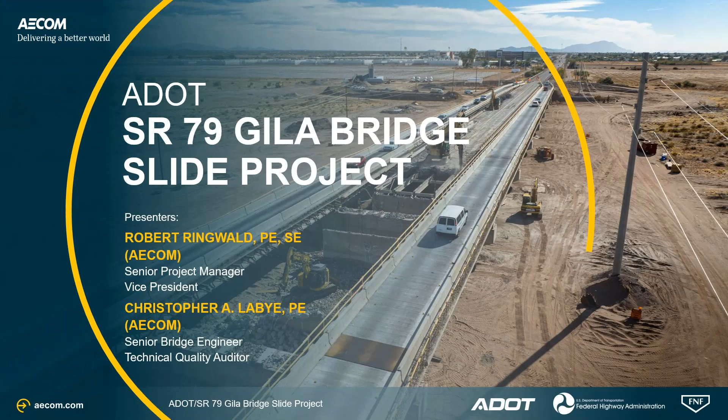All right, thank you, Kathy. Okay. So this is for the SR-79 Gila River Bridge slide. It was a project done with ADOT and the Association with Federal Highway Administration. Go ahead, Chris. Next slide. Okay, this is Chris and I. Go ahead.

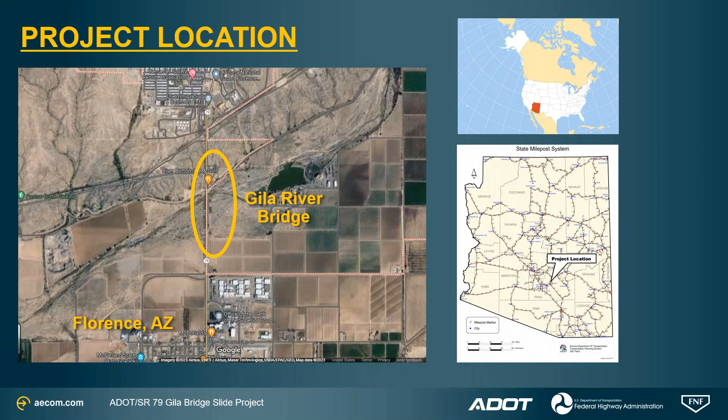Okay, the location, it is in Arizona. The location is kind of southern Arizona. It's just north of the town of Florence. And this is a critical road. It's kind of a bypass if anything happens on I-10, which is a major connector between Phoenix and Tucson. So this is a bypass. It does get a lot of traffic. Go ahead.

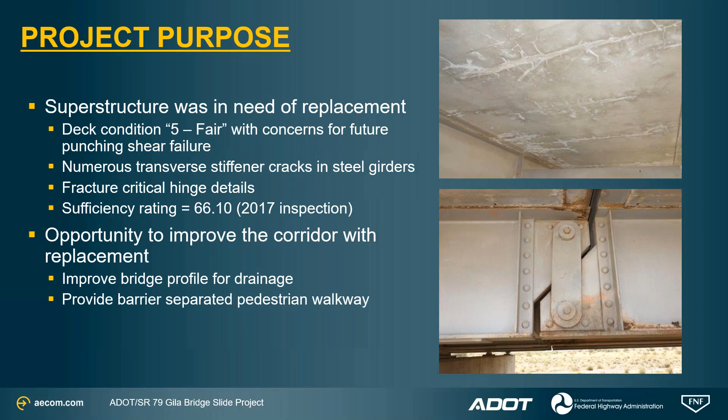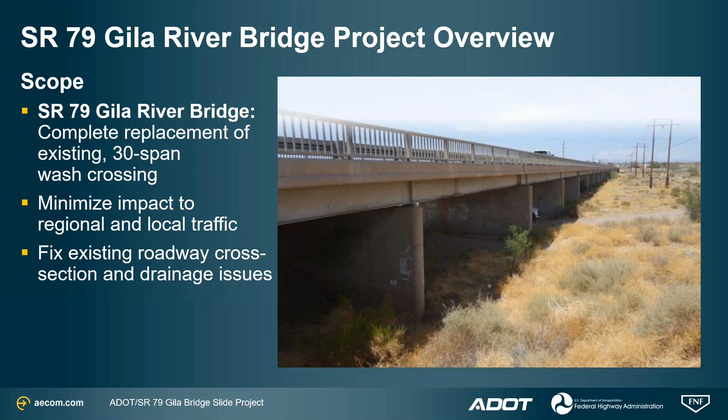So the need for it was the superstructure was in deteriorating condition. The deck was in bad shape. We also had these pin and hanger details which were fracture critical. So it was decided to replace the bridge. Next. So it was complete replacement. The existing bridge was a 30-span bridge. And really our focus was to minimize impacts to regional traffic because this is a highly used corridor. Next one.

So this is the existing bridge, 30 spans. There were several different bridges built. I think the first one, that isn't showing up here, was even in the late 1800s. It used to be an old wagon trail. They built a bridge half the length of this bridge, and then after some flooding, they extended the bridge, made it twice as long after they had flood issues. So you can see all these existing piles and foundations. Next one.

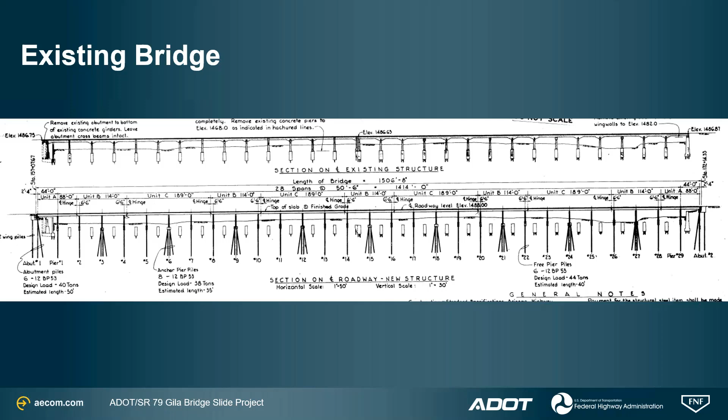All right, so we did follow a NEPA process. The utilities were a major issue. We had utilities on both sides of the bridge, and we had to get them out of the way. Right of way, we acquired right of way. We even acquired a utility corridor on the east side of the bridge.

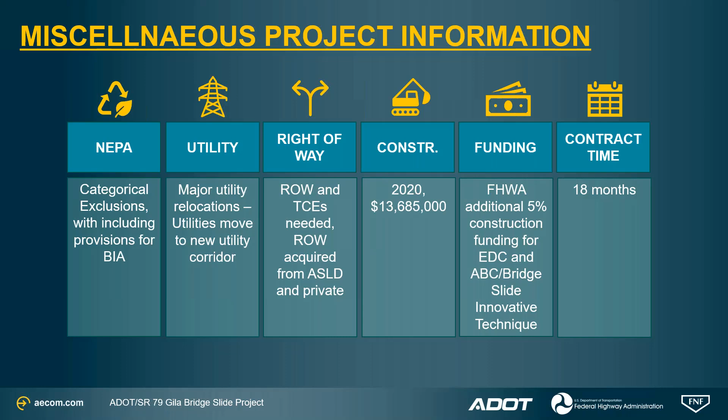Construction was funded in 2020, and it was almost 14 million. FHWA, because it was Every Day Counts, and I'll get into that, but there were like 8 Every Day Counts initiatives. We were able to increase the funding by 5%. And then the contract time was around 18 months.

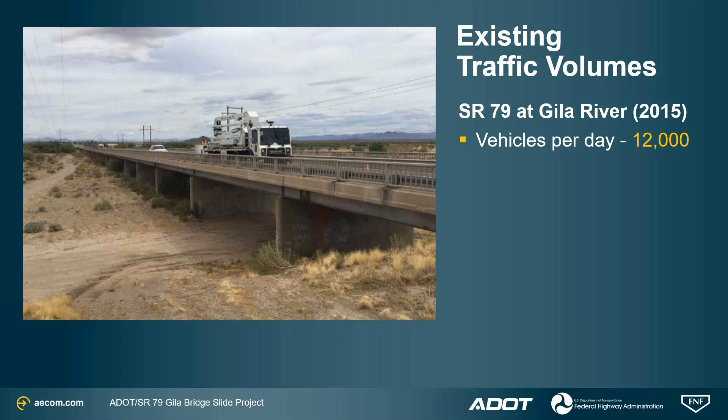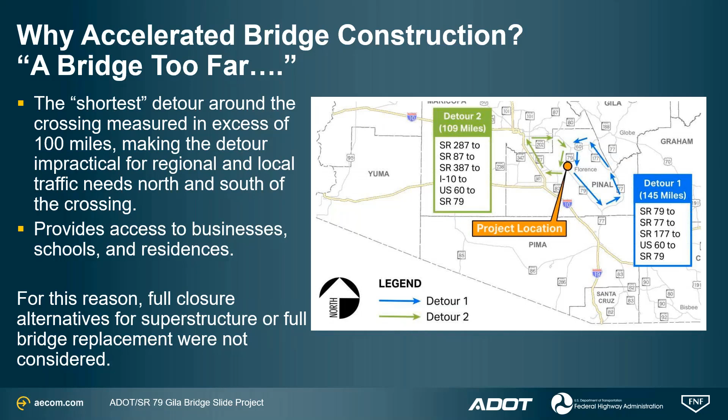So we did, FNF Construction was selected. They were the construction manager at risk. And the project team developed a slide solution for this, where we could build the bridge off.

We could build the slide portion off to each side of the bridge, come in, demo the existing bridge, build the approaches while traffic was maintained on the slide portion, and then slide it in place over 2 weekends.

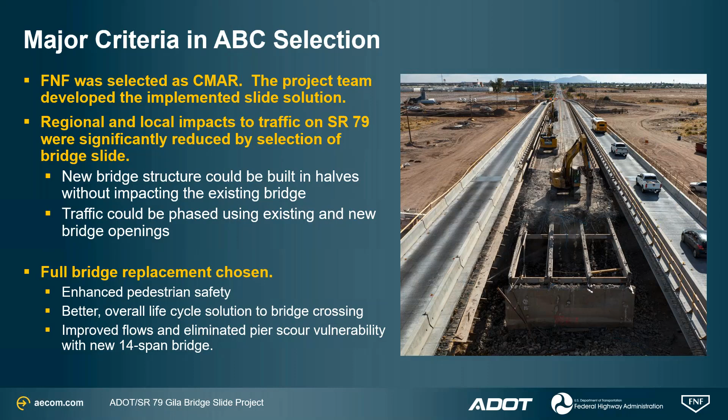Next one. So construction manager at risk, CMAR, also known as CMGC, depending on where you're at. The way that works is you have the owner, which was ADOT, and the design engineer reports directly to ADOT. We also have the contractor, who is selected based on qualifications. We always recommend them being selected early because it allows us to get good input.

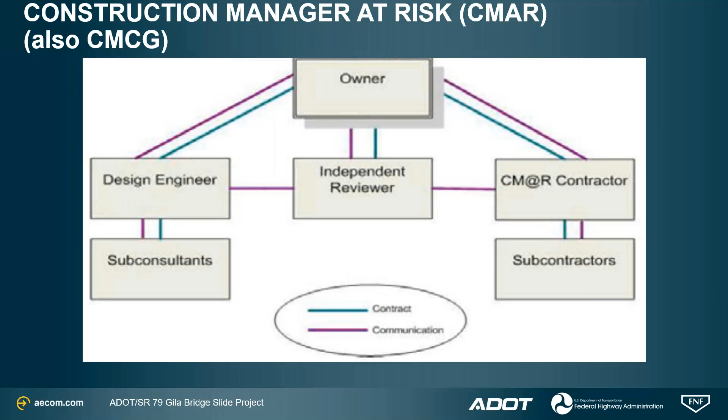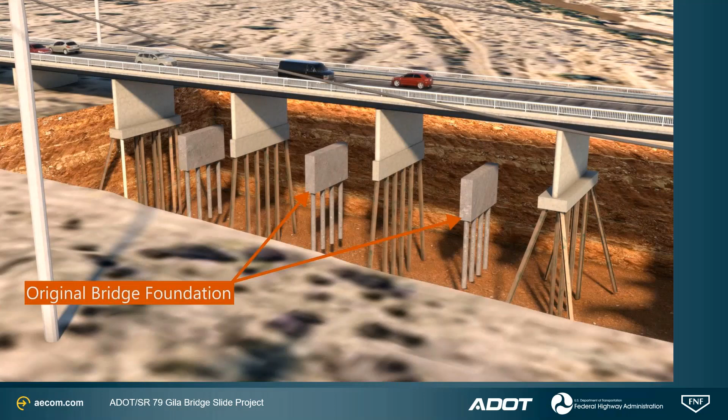So here's a video that shows a little bit. Now, we did have a utility corridor. We had power lines that were in the way. We moved the power lines out of the way so that they could erect the girders, do the drilled shafts, place drilled shaft reinforcing. And then there's the existing foundation, so you can see what we had to miss.

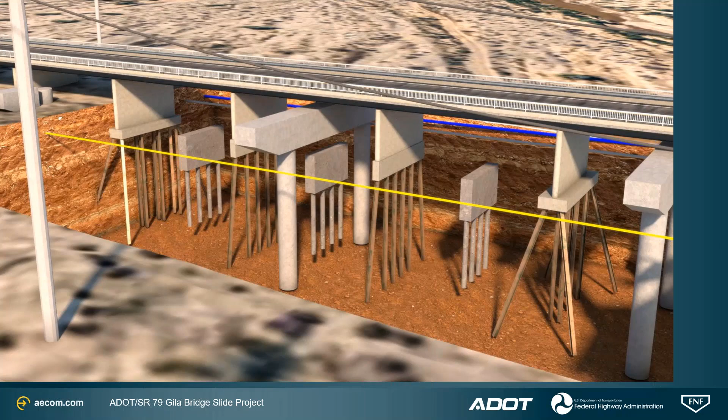Okay, and then what we did is we built our bents underneath the existing bridge on drilled shafts, and the drilled shafts were placed on the outside of the existing bridge so they could get them in. And that helped us avoid some of those existing foundations. Next slide.

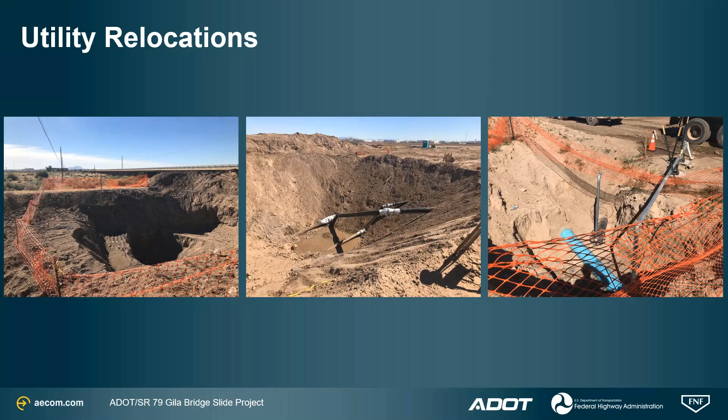Okay, so utility relocation, that was a major thing with schedule, trying to get all the utilities relocated and right of way cleared for that. Next one.

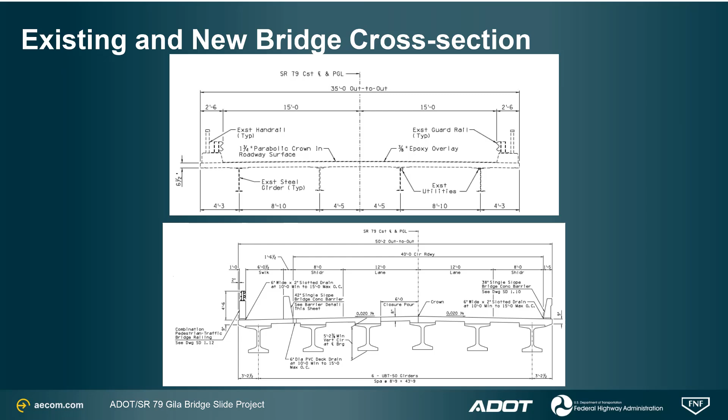Thanks, Rob. So as we just mentioned, we were going to construct a bridge to provide shoulder and sidewalk enhancements. So when we considered the development of the bridge slide, the proposed bridge was 14 spans overall, with spans arranged at 101 feet on center with 99-foot 5-inch end spans. And that was done to line up with existing pile foundations that would not be in conflict with the shafts. So the span arrangement actually worked out fairly nicely.

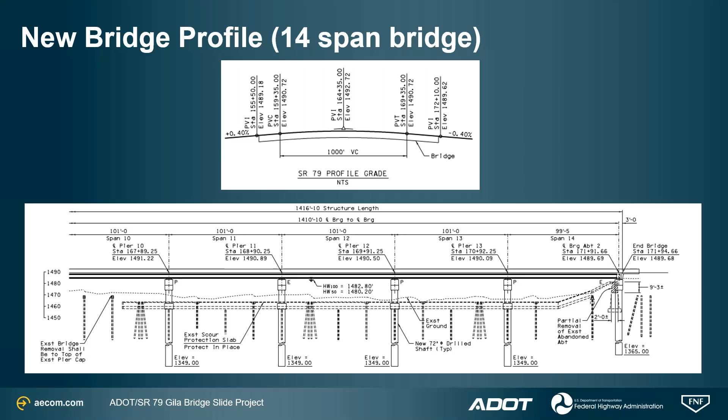So in order to accomplish the bridge slide itself, as Rob mentioned, we constructed drilled shafts and columns on either side of the existing bridge and built the pier caps beneath the existing bridge superstructure. We used 58-inch bulb T precast concrete girders, 3 girders on each side.

And what this allowed us to do was to build each half of the bridge on either side of the existing bridge, which allowed the existing bridge to remain in service while all of this could be built on either side.

And once the decks were poured and the diaphragms and slide shoes were completed, we were able to shift traffic to the new portions of the bridge, each half on either side, using temporary concrete barriers. And this allowed us to demo and remove the existing bridge between the two bridge halves.

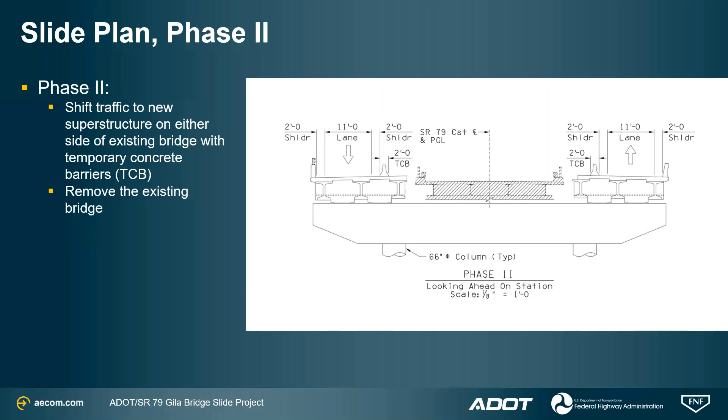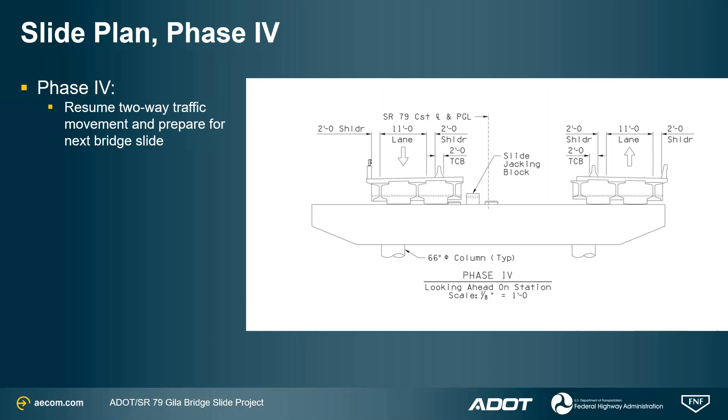Once we were ready to actually do the bridge slide, each bridge slide was accomplished during a single weekend. Traffic was shifted to the other side, with flaggers, in order to permit one-way traffic movements across the bridge while the bridge slide was taking place. Then we would resume the two-way traffic and prepare for the next bridge slide. And then we did the same thing on the other side, using the slide jacking block and the PT rod, which we'll show you in a second.

And then in the final phase, we still have the temporary concrete barriers, and we had sufficient room to do a 6-foot closure pour between the two temporary exterior girders, which would become interior girders. And that width of a closure pour allowed us to lap in the reinforcement steel as well as provide a closure between those two deck edges to smooth out the overall transition. And during that time, expansion joints were placed at the end of each frame.

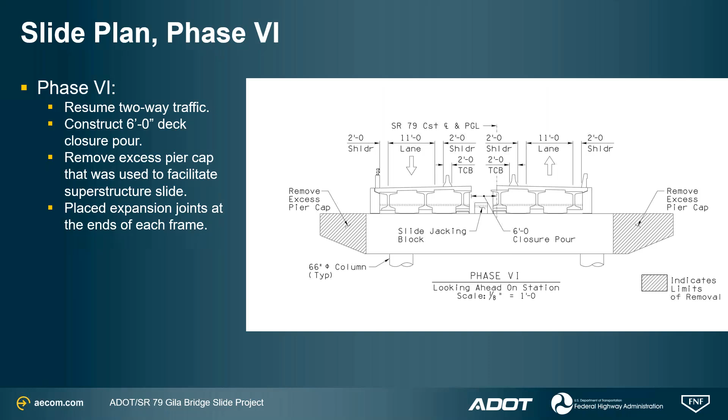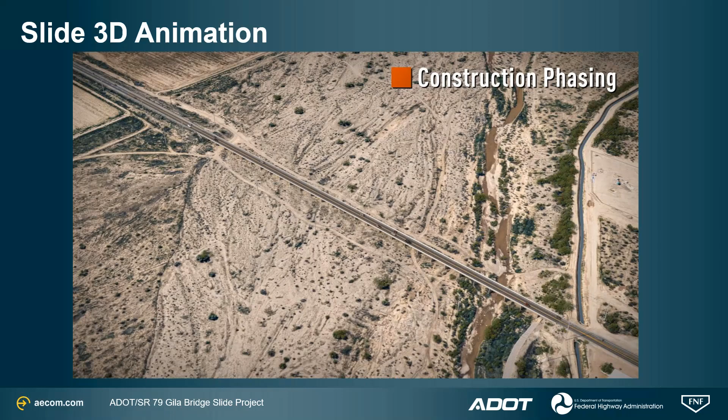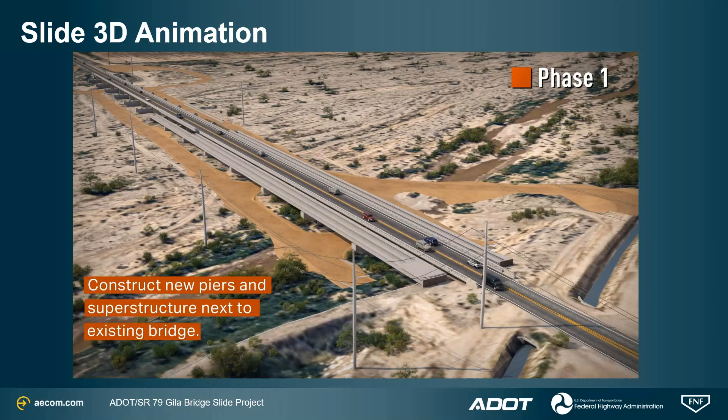A picture is worth 1,000 words, but video really helps to illustrate how this actually takes place in practice, especially with a bridge that's 1,416 feet long. So you can see that the construction access roads were built to accommodate construction vehicles. The drilled shafts and the piers, as well as the girders, were erected on both sides of the existing bridge. Traffic was then shifted to the outside so that the existing bridge could be demoed in between.

And then, hey, Chris, this did allow us to build the abutment in front of the existing abutment and allowed us to build the approaches. Correct. During the demo phase. With a very similar kind of detailing, except for a back wall.

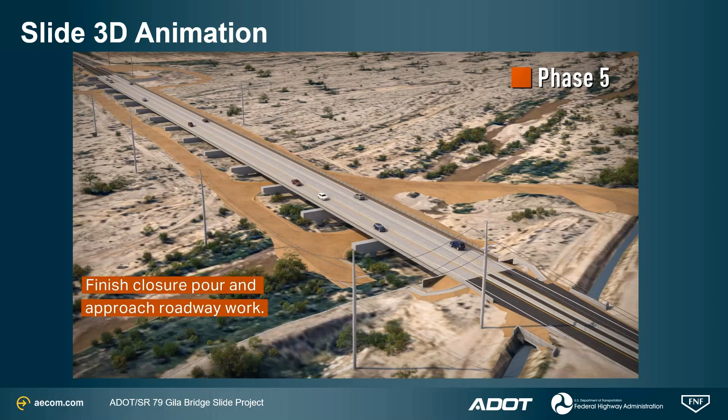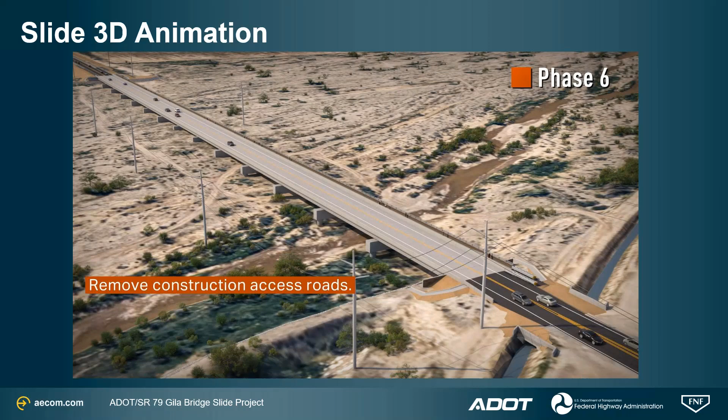Now, when the bridge slide was taking place, it was a series of four 3-span frames and one 2-span frame. So each unit that was continuous was slid in unison. Then the closure pour was placed, and then everything else was finalized, and on the new pier cap, the superfluous edges were removed. We'll get into that shortly.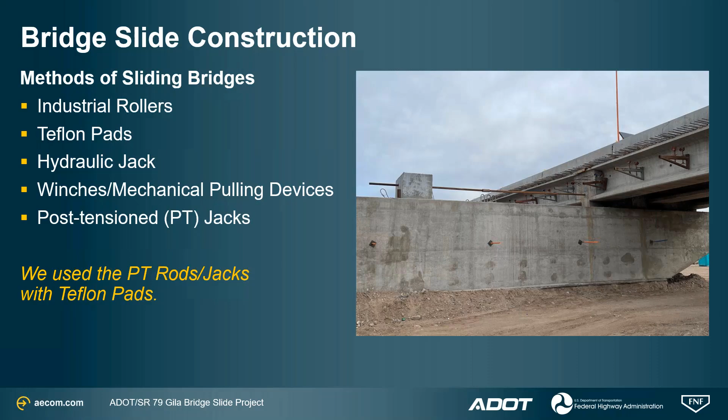So there are several different methods of sliding bridges. We opted to use PT rods with Teflon pads. It gave us the ability to limit snapback, improve jacking efficiency, and with end blocks that were providing the ability to back up the slide.

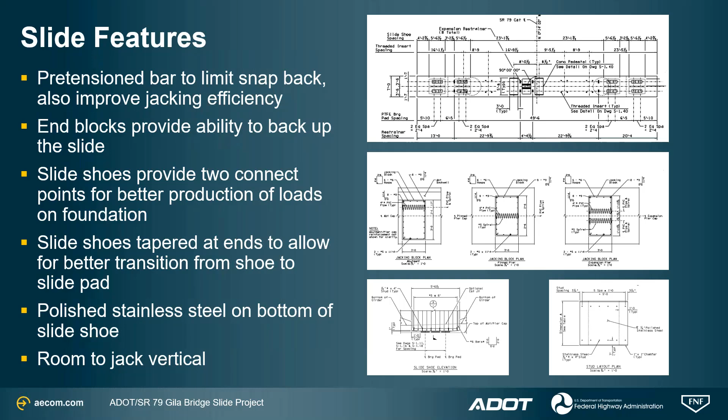The slide shoes that you can see on the bottom left allowed us to use a series of Teflon pads that would allow the bridge to walk across as it slid, and they were tapered, which allowed for better transition of the slide shoe onto the Teflon pad, so it could gradually transition into the Teflon pad as pads were removed and advanced as the jacking was taking place. It also allowed us to jack the shoes vertically for final bearing placement.

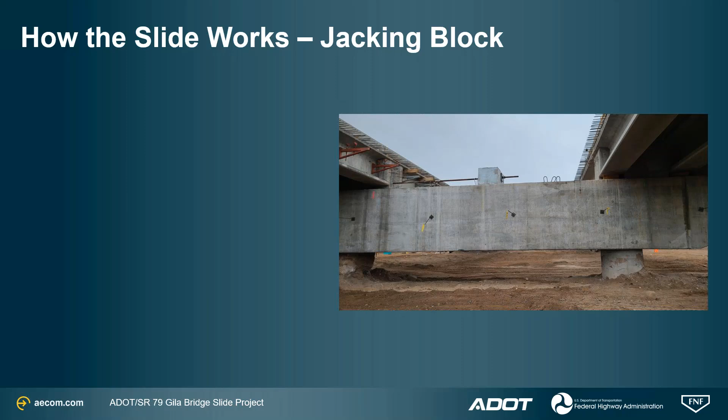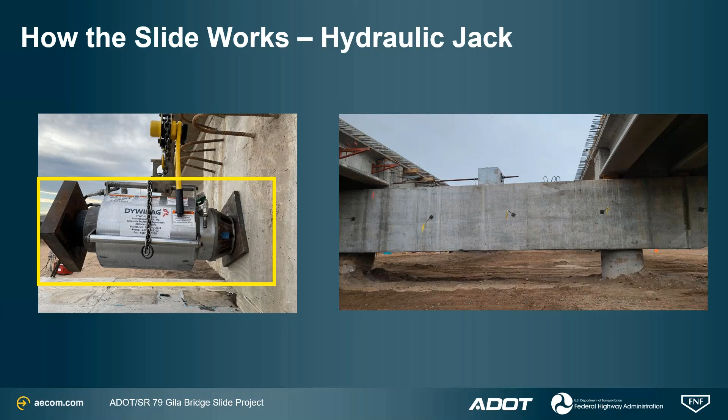Now, these are the elements of the actual slide. So first of all, we have the jacking block, and that is designed to take the full load of the jacking force for sliding. Then this is the actual hydraulic jack itself using DYWIDAG. Then there's the PT bar itself.

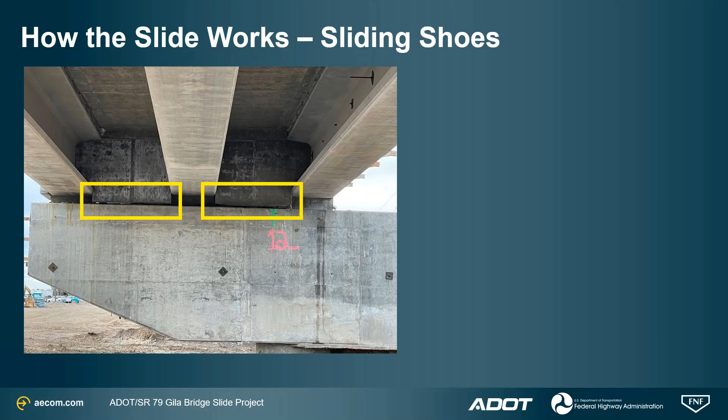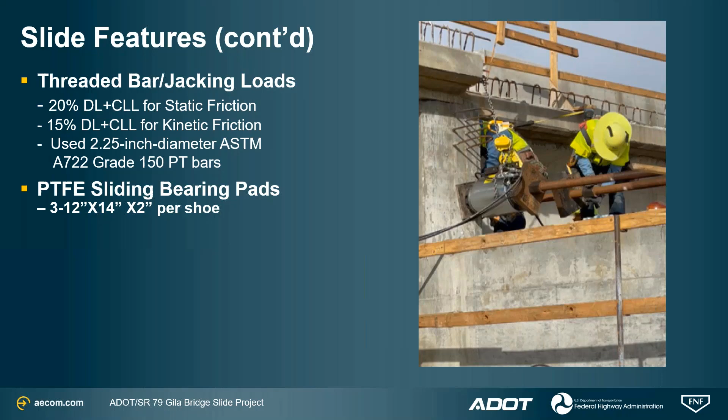The threaded bar was designed with 20% of the dead load and the construction live load for static friction, and 15% of the dead load plus the construction live load for kinetic friction. We used a 2¼-inch diameter grade 150 PT bar, and the sliding pads consisted of three 12-inch by 14-inch by 2-inch Teflon-coated bearing pads.

One of the complications that we ran into with the slide: this is a typical fixed and expansion restrainer detail, and this is usually cast into the pier cap to be eventually closed in with the pier diaphragm. However, we could not actually cast this into the pier cap without the slide interfering with the restrainer locations. So we had to come up with a means of incorporating that into the pier cap and at the same time allowing for the bridge slide to take place.

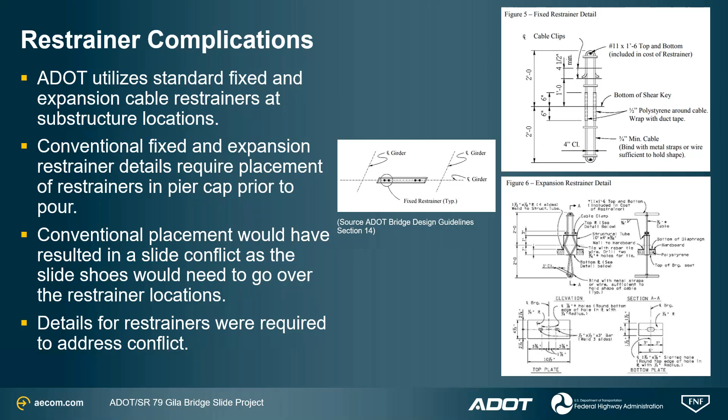The solution that we arrived at was to place a steel tube insert that allowed the contractor to tuck in the assembly into the pier cap itself so that the bridge could slide across the top of it, and then the cables could be pulled out and the restrainer assembly could be completed at that time.

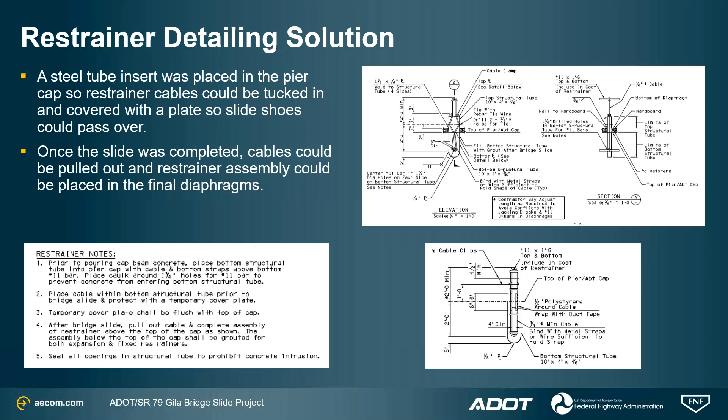So as part of the bridge slide design, all the bridge caps, pier caps had to also be designed with the new bridge on either side prior to the slide. And then there's a phase where you've got half of your bridge slid into place, and then you've got the phase where the remainder of your bridge is slid into place with a closure pour. So you're looking at essentially several design conditions to make sure that you've got sufficient flexure as well as stirrup steel in there to accommodate whatever loading condition might be taking place during the individual phases.

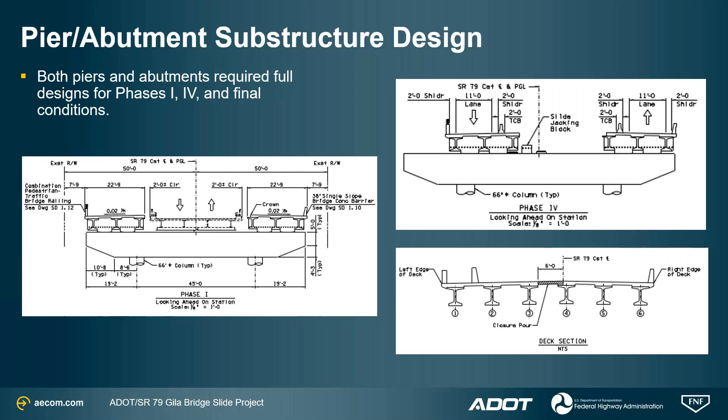Upon completion of the bridge slide, excess pier cap material was removed. Part of it was to mitigate any excessive dead load that would result in undesirable PT effects. But also there was a concern on the sidewalk side that somebody may hop a barrier and decide to walk along the pier cap, and that was a safety issue that we were definitely concerned about.

So one of the things that we detailed for that pier cap removal was the means of providing a clean looking pier cap at the end, where the reinforcement would be tied in on either side to make it look like a clean finished pier cap at both ends. It also helped to mitigate the hydraulic impact. With that, I'll turn this back over to Rob to talk about the construction.

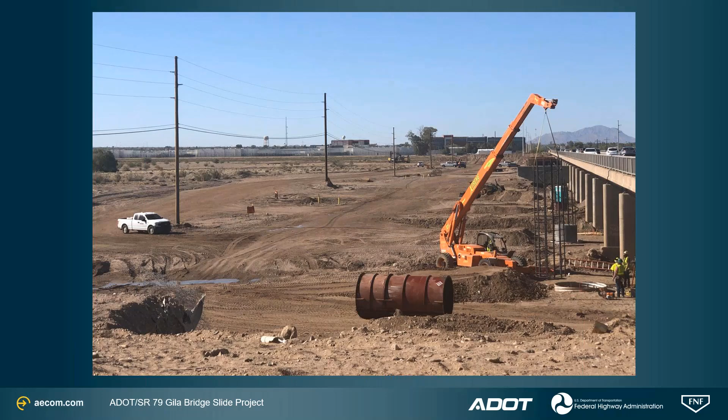So this is under construction now. In Arizona, a lot of our rivers don't flow all the time. So we did have a little bit of flow down in the Gila, but when we get monsoons and other things, they could become raging, and they get quite a bit of scour. So one of the issues was that we had to account for scour. There was some potential aggregate mining upstream. So the scour depth had to be designed around 45 feet. So very critical for the bridge.

You can see here, in this picture the power lines that you see were relocated along a utility corridor to get them out of the way, and this is them setting the reinforcing for the drilled shafts. Next slide. So this is them building it. The pier caps, it was kind of a shallow foundation there, but again, we can get up to 45 feet of scour. You can see where we're building the bent cap underneath the existing bridge, so we can keep the traffic open. Next slide.

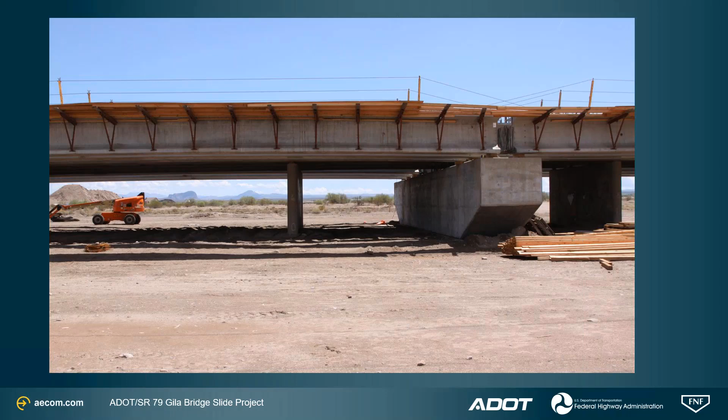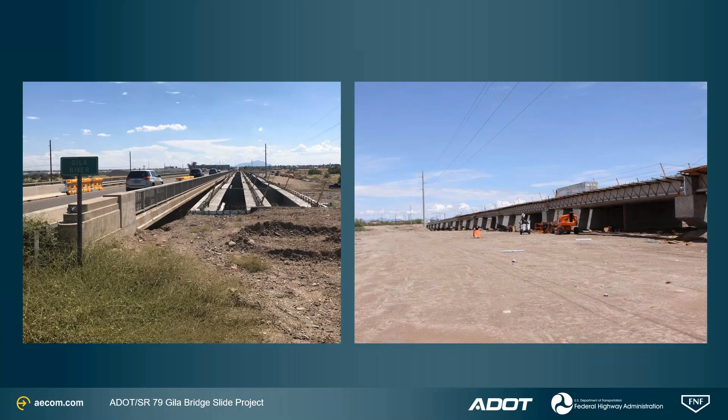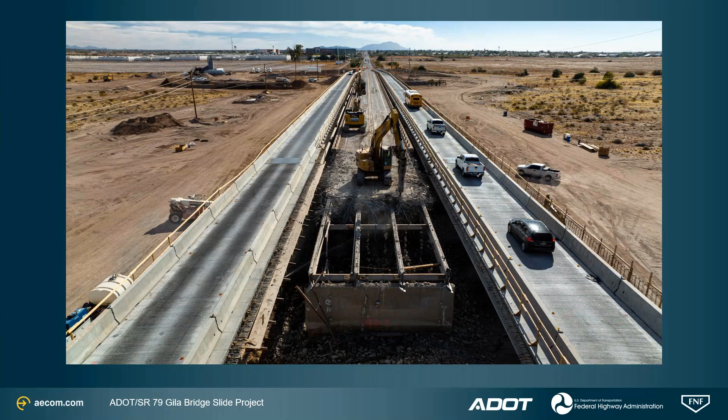There's another one where they set the girders, set the overhang formwork. Next slide. So at this location, during this phase, we were able to build the approaches because the abutments were set in front of the existing abutments. Then we built the approaches for the next phase, and we were able to demo out the existing bridge while traffic was on both sides. Okay, next one.

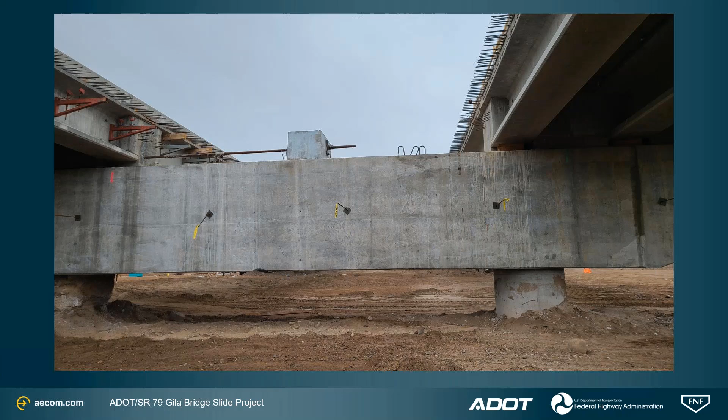Okay, this shows that center block with the PT rod. On other bridges, we put a block on both sides so we can reverse it. On this one, we worked with the contractor. Given that we weren't sliding very far, we didn't have a whole lot of elongation of the rod. We just went with a single block in the middle. Okay, next slide.

So we were out there the whole time during the slide process. We had engineers on site, myself. For one of the frames, it took them approximately 8 hours to slide one frame. So they were sliding 2 frames at a time. The weekend closure was about 10 o'clock on Friday night to, I believe, 5 o'clock on Monday morning, when they had to have it open for traffic.

And during that time, the traffic was one lane on the other side with the stoplight. We got a little bit of a backup, but not too much. But the bridge was able to be slid within that time frame. If they were really pushing it and trying to be a little bit more efficient, I think it could even be less. Like I said, about 8 hours per slide per frame. Okay, go ahead.

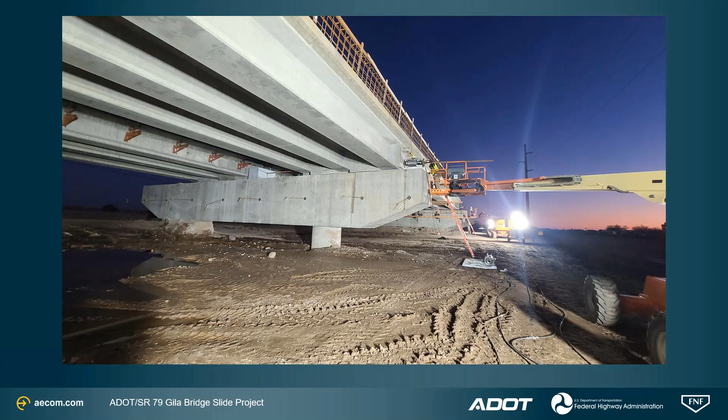Okay, another picture during the slide. Like Chris said, they do monitor the slide so that we're trying to keep it less than a ½ inch of difference between each of the diaphragms. They constantly are measuring that to make sure that it's being slid at the same rate. If we get it too advanced on one of the ends, you can get it skewed a little bit and out of alignment.

In between each of the frames, we did have like a 3-inch expansion joint, so there was a little bit of gap in between each one. This shows when we get a flood in Arizona. We did get some monsoon weather in January, and the river was flowing pretty good. Luckily it came down a little bit so we could complete the slide the following weekend. We didn't have to delay anything. Next one.

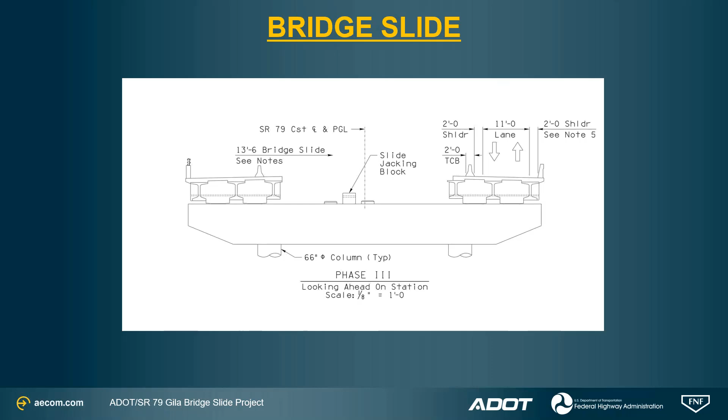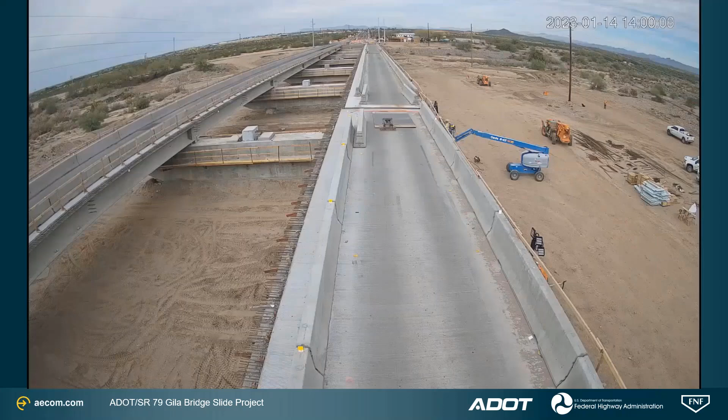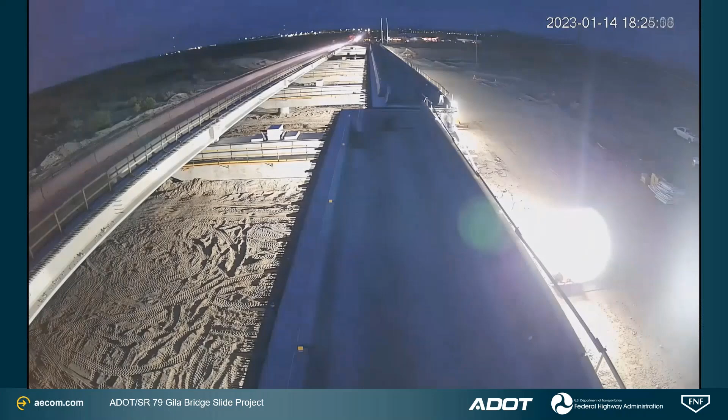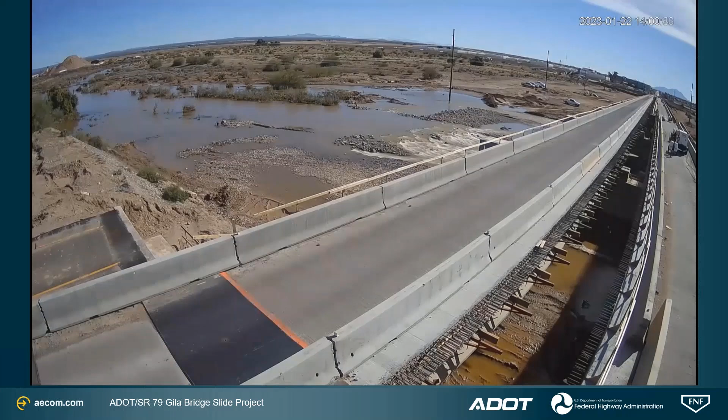Yep. And then over the expansion joints, we just put metal plates so that traffic could cross. You can see the metal plate sitting there. But here's one of the slide, actually. When you're out there watching these slides, it's kind of like watching paint dry. They move pretty slow. This is where they're sliding one of the last frames in place, and you can see where we're going to have our closure pour.

We had, I think, about a 6-foot closure pour. We try to make those closure pours as large as possible because you do have a little bit of difference in camber between the 2 bridge phases, so we want to give it as much tolerance so you have rideability there. Okay. Are you playing the video, Chris? Yeah, this is going to be a video that ADOT, well, I'm sorry, my apologies.

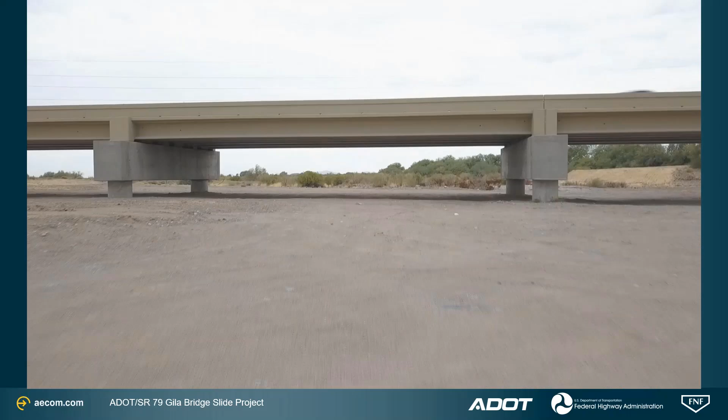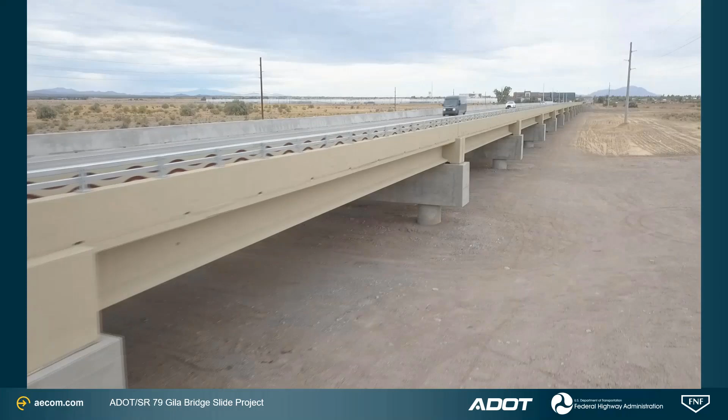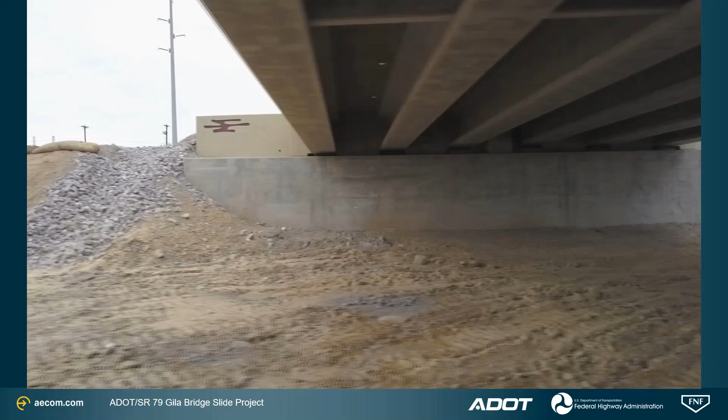This is actually drone footage of the completed bridge where you can see the individual elements. There's the abutment that Rob had mentioned. Right, and at the abutments, we had wing walls as part of the slide, and we just left those in place. Those acted like the wing walls, so that saved cost. FNF was a really good contractor to work with in the CMAR process. That really works well because we have their input starting during the 30% design.

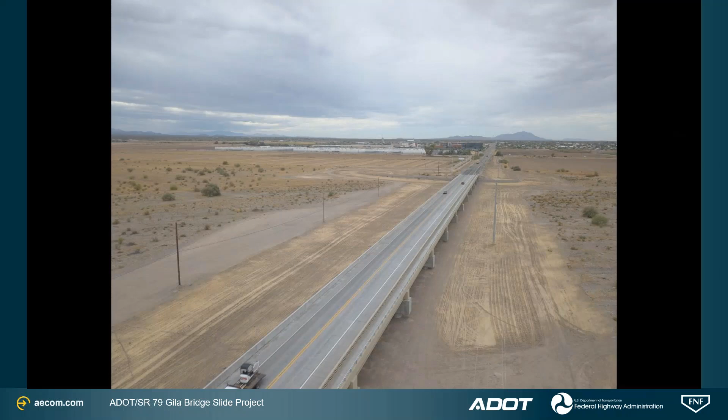Right. So the next video is something that ADOT put together for public relations to let everybody know what was going on with the project and how everything was advanced.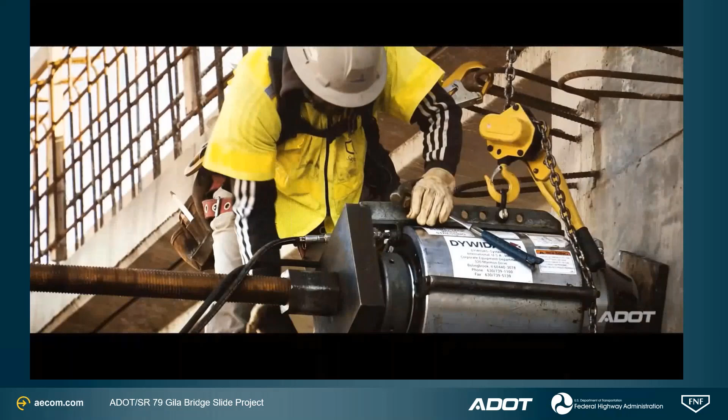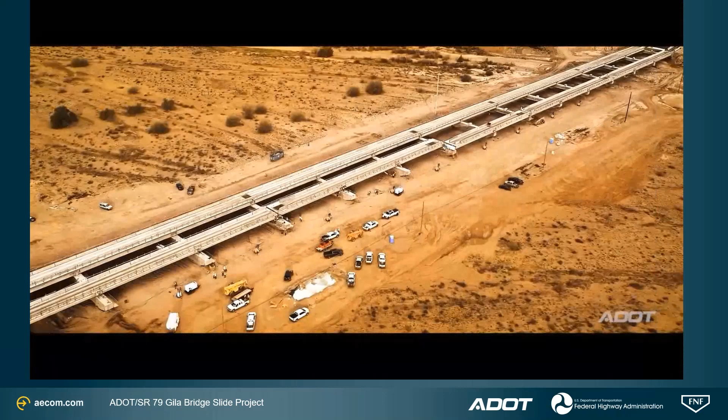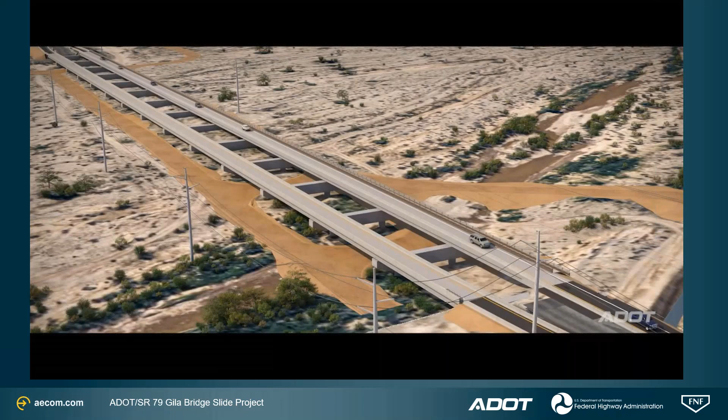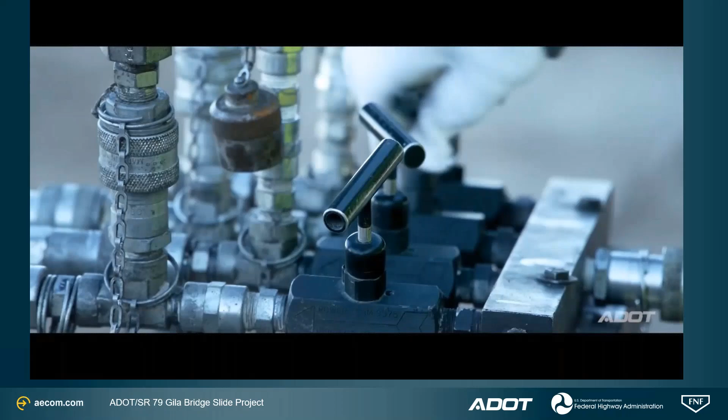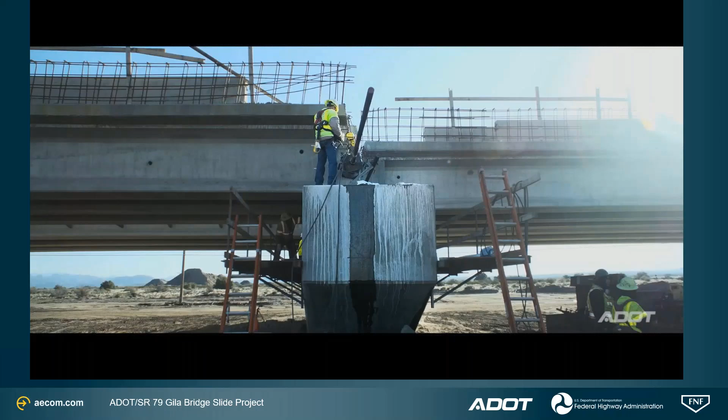We use hydraulic jacks to push it in, and they actually use Dawn soap to keep it moving. It just helps it go a lot smoother, and it's safer in the environment as well. Correct. Takes oil off the baby ducks.

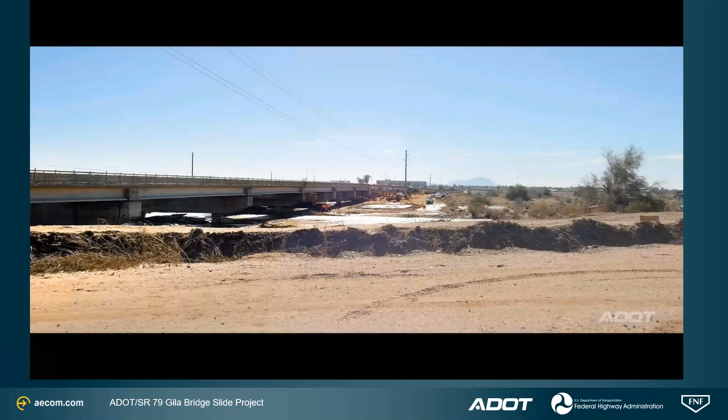So this is a 2-lane bridge that has reached the end of its life expectancy. So the 2 12-foot lanes, no shoulder at all. The new bridge is going to have 2 12-foot lanes, but 2 8-foot shoulders on each side as well. And we're also adding a 6-foot pedestrian walkway on the west side of the bridge. We're going to be able to increase the ability of heavy loads.

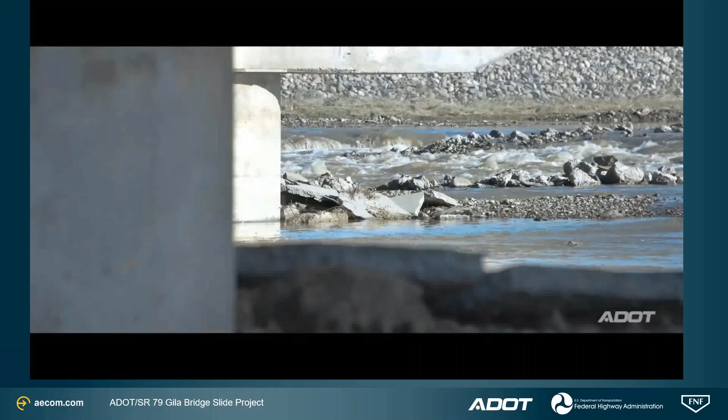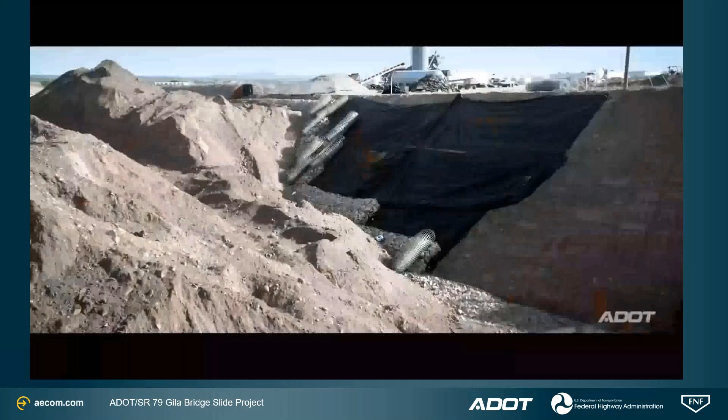There's a couple of unique challenges. The first is the fact that we're trying to reconstruct the bridge over the Gila River. We have monsoons that we have to contend with. We're reinforcing a lot of these abutments. We're putting gabion baskets in there, and it goes probably about 40 feet down, so we don't wash out the abutments.

So I think everybody's excited to see this new bridge come along, and yeah, we've had nothing but good things about this project. We do want to thank the public for patience in this process. We've tried to do as little disruption as possible to the flow of traffic. It's our idea to stay out of everybody's way so the traffic keeps moving.

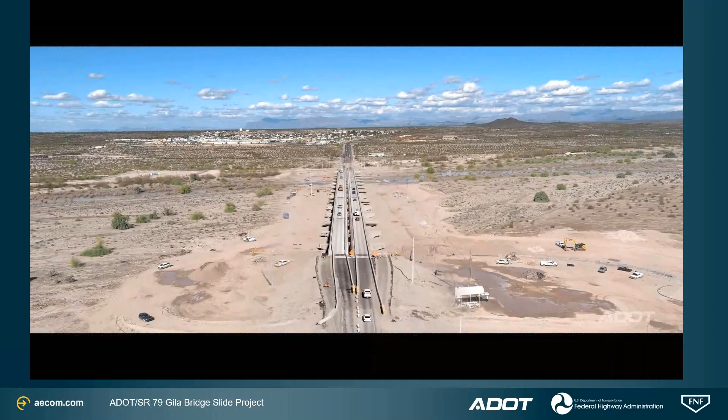All right, so I did want to mention this project included a bunch of FHWA Every Day Counts initiatives. Some of the initiatives included accelerated bridge construction for the bridge slide. It did the construction manager at risk, CMAR, also known as CMGC. We did do 2D hydraulics. We created a 3D model of the project, and then the contractor did the 4D and 5D modeling.

So the 4D captures the 3D model on the progression of construction, and the 5D captures the cost as you progress in construction. We also used ADOT's drone LiDAR, so they did do some mapping to help support the design. And then I did include down at the bottom the Every Day Counts, Federal Highways, very helpful link. They always have some good innovation, good ideas, and the link's down below.

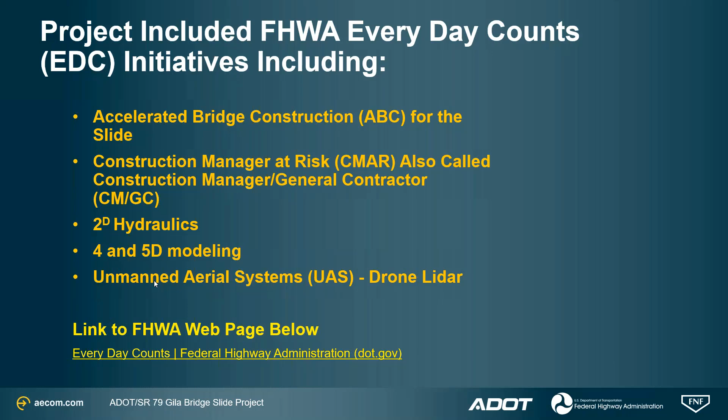Okay, next one. So the project cost, we get a lot of questions on this. This is in 2020 dollars. So when people think about CMGC, contractors selected based on qualifications, do they really get a good cost for a project? And with the ICE, I think we really get a good cost. We can get into that. But this total bridge cost was under $200 a square foot. And that includes the spur dike we built on the south side, the roadway improvements and the approach work, all that, and we're still a very competitive cost.

The extra cost of the bridge slide, you know, when we looked at different alternatives, one of the alternatives included a local detour, and trying to improve that detour would have improved some of the intersections, pavement, and all these other things. The bridge slide was the most economical alternative.

And on the north side of the project, we were restrained by a canal that was owned by the San Carlos Irrigation District. It's part of an Indian community facility, so we had to go through BIA and everything else just to go over that canal. So we were pretty well constrained. We did look at alternatives to try to build it offline, but that really didn't pan out. This was the most cost effective.

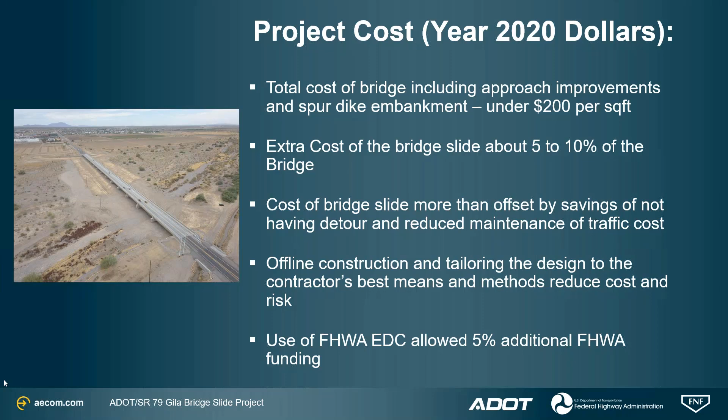And when you do a typical design-bid-build, they're always looking at maybe changes to traffic or other things, but having them on board through the process helps us tailor that to their means and methods. I think that helps reduce the cost, and it also helps reduce the risk, because they understand everything about the drawings. It really reduces claims. We only had a couple little change orders that were real minor, just from things unanticipated. Again, that allowed use of an extra 5% of FHWA funding for the project, which helped out.

Next one. So lessons learned: building those big pier caps underneath the existing bridge. When we did have the CMAR process, we talked through it.

We had a couple, they had some ideas on how to keep some of the levelness that wasn't necessarily followed through. So there was a little bit that they had to resurface by grinding and placing a little bit of overlay and stuff just to make sure that they met our tolerances. So we put in construction tolerances.

That way, if something's a little bit out of level, when we did our design, we checked that bridge and it was designed for things to be a little out of level, minimally out of level, I say, but that it could accommodate that.

I think when we were jacking it, the contractor was able to keep the frames well within a 1/4 inch, but we did allow for a little bit of deflection between the diaphragms, but it was so stiff that we didn't even see any of that. We did not see any kind of cracking of any of the bridge. The deck or the diaphragms went real well.

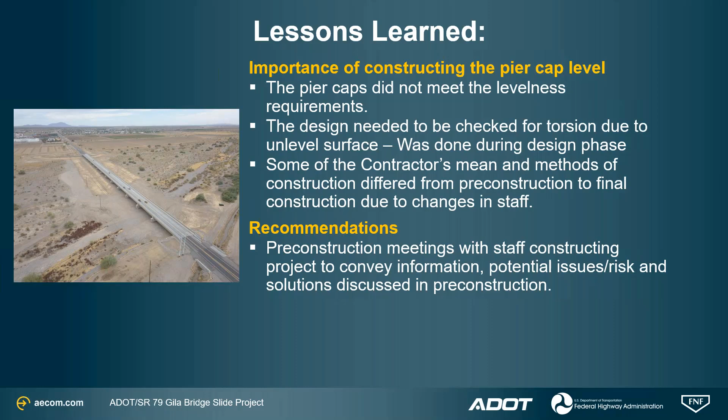So success, boy, this was very successful. The public was very happy with this, being able to keep it open. We received a lot of positive feedback. We eliminated that 100-mile detour to try to keep it on a state route. We were able to maintain the traffic with only those two weekend restrictions, and those maintained one lane of traffic with a stoplight alternating directions. So it was really minimal disturbance to traffic.

So as with all these Every Day Counts projects, it increases the industry knowledge, increases the knowledge of contractors. There's a lot of contractors and engineers looking at this, it just helps with our database. And then we can see what it costs, so that it does reduce their risk and people are more willing to use these innovations. Excellent.

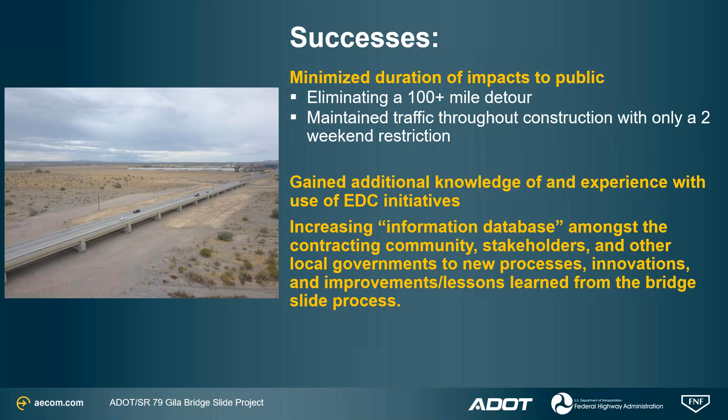Okay, so as I stated, the project was a great success for ADOT and stakeholders, and we received a ton of positive feedback from the community, from Pinal County, from the town of Florence, all positive.